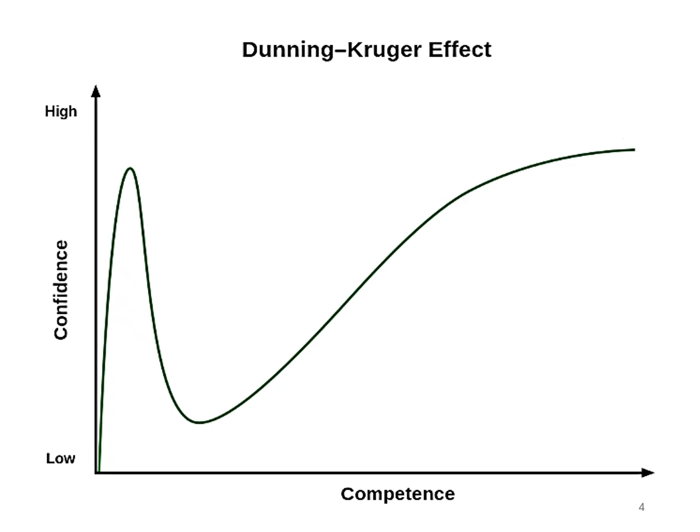Which brings me to Dunning-Kruger, which I prefer to call the Machiavelli-Schopenhauer effect, because these guys, Machiavelli and Schopenhauer, talked about the same thing hundreds of years before Dunning and Kruger. It is a principle relating confidence and competence that can be summarized as the more you learn, the less you know. That is, the more you doubt yourself.

I realized that quite strongly when I was completing my Viva Voce exam at the end of my PhD. Basically, a Viva Voce means living voice. You've written a thesis and you defend it in front of a panel of professors who in principle understand and know everything about the subject. And they question you. And when they question you, you realize how little you know. And it's very embarrassing. So I passed.

I don't know why, but I think I was probably in the bottom 10% of all the students that my supervisor had. But at the end of the exam, I was in his office and he looked at me and he says, "What's wrong, Malcolm? Why do you look so glum?" And I said, "You see that door?" And he said, "Yeah." I said, "I feel I could walk under it. I feel so small. Either walk or slither under it." And he looked at me, he didn't smile, but he said, "Good, because if we let you go out of here thinking that you knew something, we would have failed."

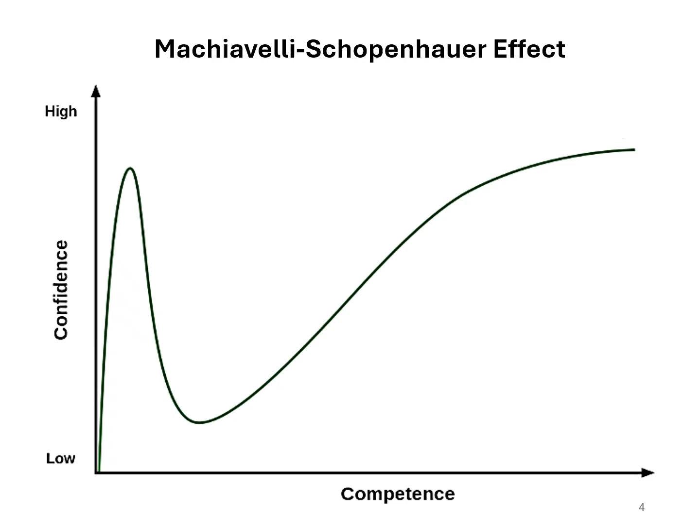I understood that. I spent 45 years in research, and in the last 15 years, I was an R&D manager. I came across two types of people. Those who were receptive, that are willing to talk and listen, and those who were unreceptive, and I class those people as willfully ignorant.

There have been times in the past when a material issue arose in the reactor, and I was shocked at the ignorance of some of my coworkers. In those cases, a little knowledge is a dangerous thing, meaning they believe they know everything they need to know. I once said to a fellow middle manager at Kinectrics, you know, you can lead an engineer to water, but you just can't make them think. I was so mad with them.

To illustrate, to give you some examples, once there was a commotion at Chalk River about 20 years ago. There were some concerns because there'd been some measurements done, some tests on pressure tubing, and there was an unexpected result. It was a high value. I'm not going to talk about exactly what it was, but anyway, this was S99 reportable, meaning it had to get relayed to the CNSC.

Now, when I saw what was happening in email space, I sent an email to the group and I said, oh, I think I know what's going on. You may think it's an unexpected result, but it could be very expected depending on where you took the sample. If it was at 1 meter or 2 meters from the inlet and it was at 12 o'clock, I would expect that to be a high value. I didn't hear anything.

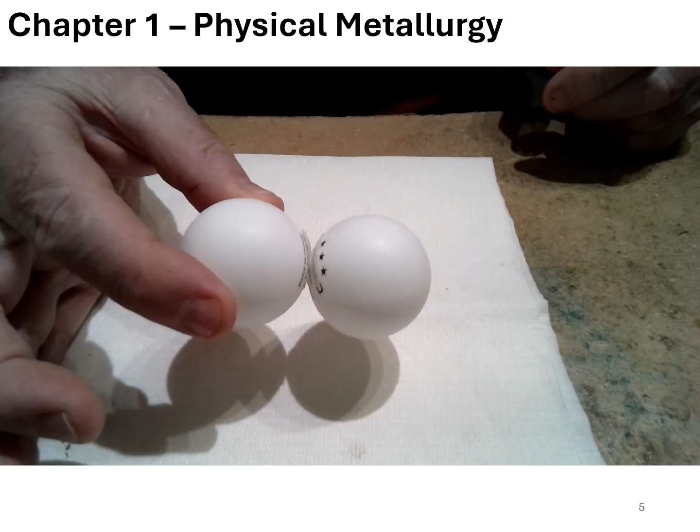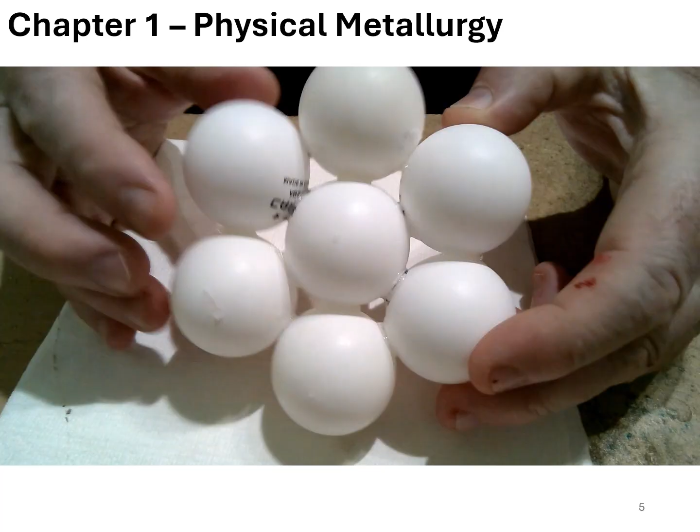Now, once we have this bond system in place, then the next level of bonding has to do with minimizing the energy of the system. And that can be achieved by packing the atoms together with the shortest possible bond lengths. And in this case, it's a close packed structure. And this is an example of a single layer of a close packed structure, and it has this distinctive hexagonal shape. So I'm going to think about the three-dimensional structure.

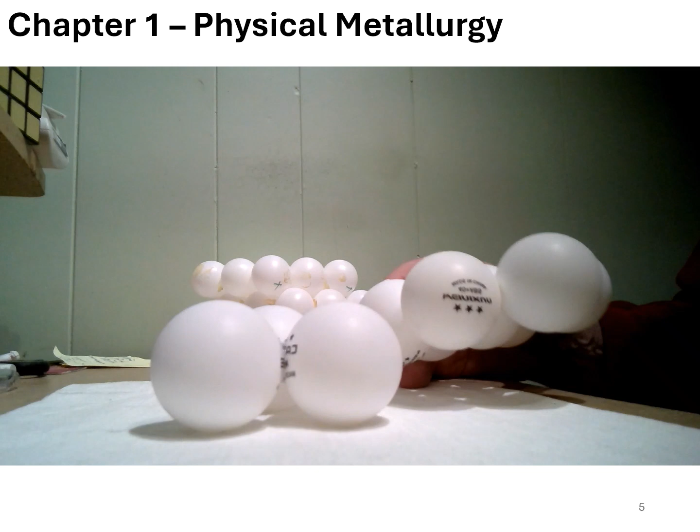Let's put down a first layer. It's easier for me to use 3 atoms in this case, so I'll just use 3, because then I'm going to sit the next layer on top, which is my close packed layer. Now, if I want to build up a three-dimensional structure, I can do it in 2 possible ways. I can either put the next layer of atoms on here, like that. And you'll notice this atom here is directly above this atom here.

So if we call this layer an A layer, and we call this layer a B layer, this atom, which has the same position looking down on the plane as this atom, we would also call that an A layer, because the layer designation letter defines the position of the atoms relative to the whole lattice. So we have what's called ABA stacking. And that defines what is a hexagonal close-packed metal, this ABA structure.

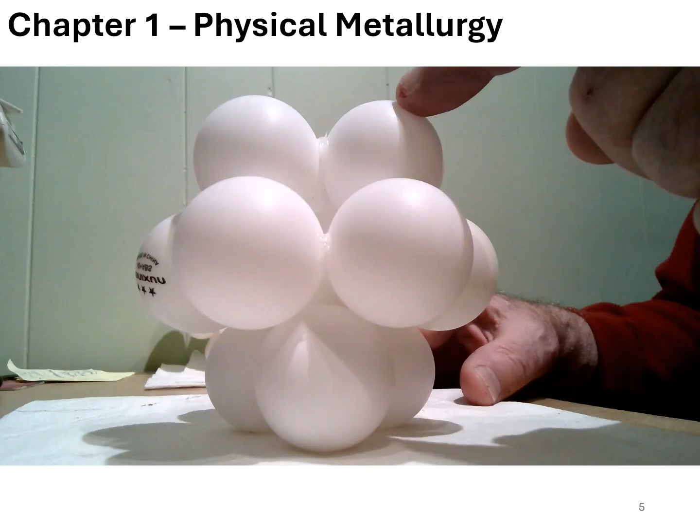Now, the third layer of atoms doesn't have to sit like that. It can sit in this position, which is just as stable. In that case, we have ABC stacking. So there are three different positions for the different layers. So what distinguishes a face-centered cubic crystal structure from a hexagonal close-packed structure is simply the position of that third layer. So this is hexagonal close-packed, and this is face-centered cubic.

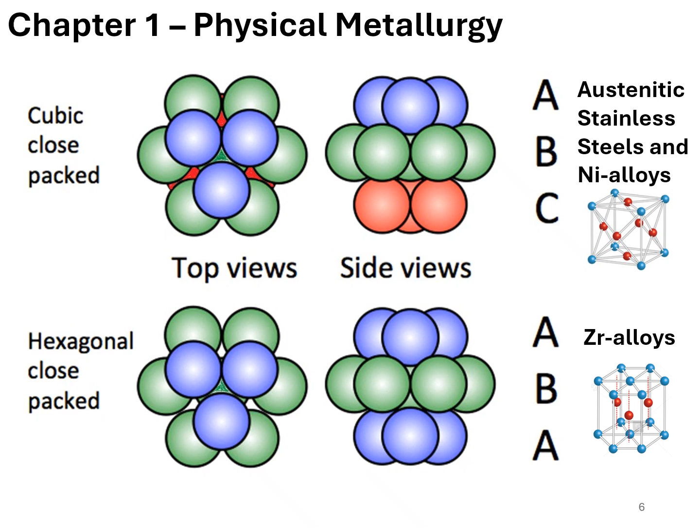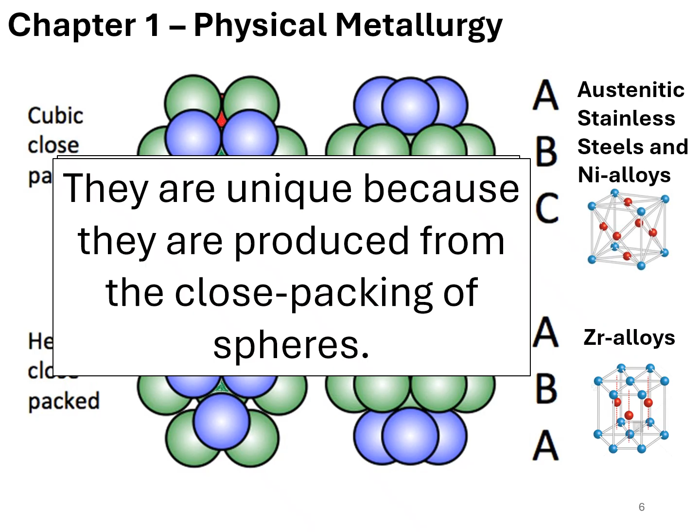Now, these crystal structures account for most of the materials used in reactor cores, but they're unique because they're produced from the close packing of spheres. But not all metals are FCC and HCP. They represent 2 of 14 different possible atomic arrangements that define the crystal: 7 different crystal classes and 14 unique arrangements that have different centerings.

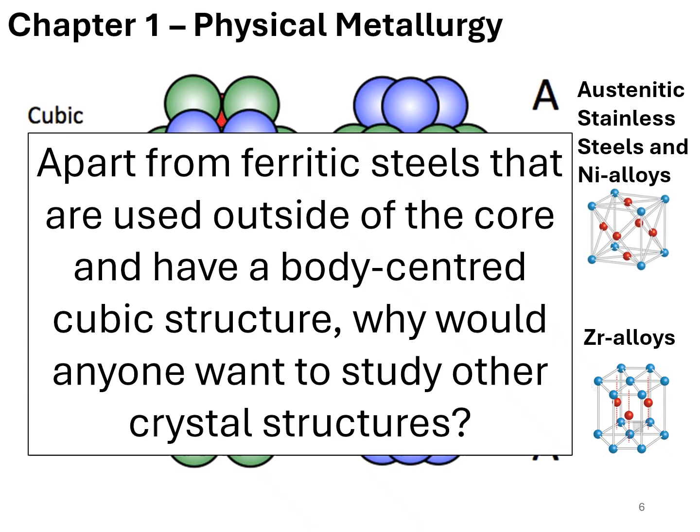It may seem boring to study, but a little knowledge of crystallography can be a source of fun. I'll illustrate this here. When I was a student studying metal physics at Bristol University, one day I was walking with a small group of fellow students for lunch at the Students' Union. We just had some lectures on crystallography. One student in the group had studied at the University of Bath and hated Bristol. He said, "I hate Bristol. Look at all these buildings. They are so monolithic."

I thought, hello. There's an opportunity for a joke here, because monolithic sounds a lot like monoclinic, and a monoclinic crystal is nothing like the slab-like shape that one would expect for a high-rise building. So I said, "Oh, I don't know. They look more orthorhombic to me." He then had 2 things to hate about Bristol: the town and me.

It is important to know some crystallography if you want to understand all aspects of metal physics, including deformation. So I'm going to give you a very brief introduction to deformation as relates to metal crystals.

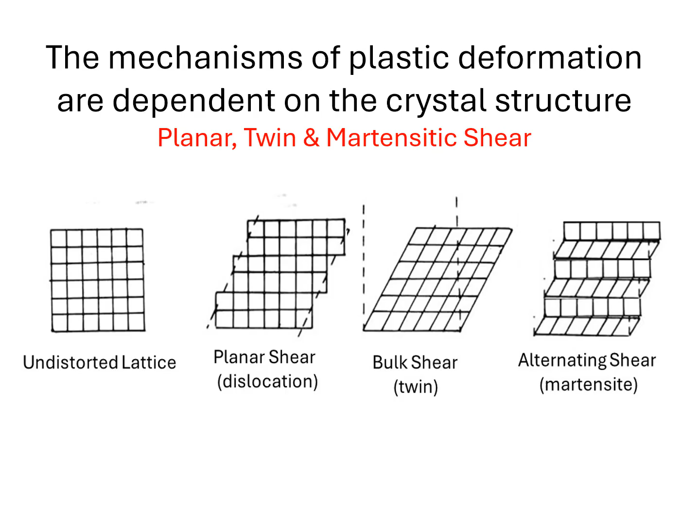Oh shit. Right now I would be demonstrating the shear from slip and from twinning and from martensitic transformation. That would take about 2 or 3 minutes, and unfortunately I can't go back right now because this is recording.

So I assume I've just told the audience everything they need to know about dislocation slip, using a ball model displayed at the front of the lecture hall. So in this ball model, I refer to slip, twinning, and martensite, which are the 3 main processes that cause deformation of metal crystals.

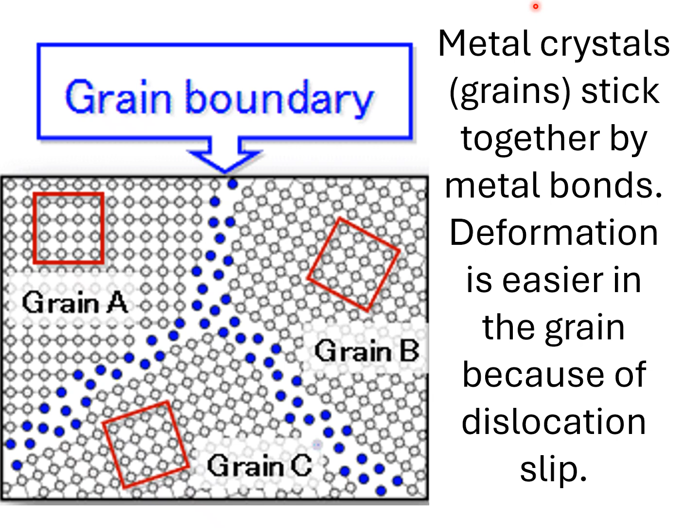So I've been describing the deformation of single crystals, but engineering alloys are made from an agglomeration of crystals that we call grains, and they are bound together by metallic bonding at the grain boundaries. The boundaries are much stronger than the grains because the regularity of the atomic arrangement actually makes it easier to cause deformation. The underlying deformation mechanism within the grains involves dislocations.

So what is a dislocation as far as metals are concerned? Just like someone may dislocate an elbow, involving displacement of a bone from where it should normally be, dislocations in metals involve the displacement of some atoms from their normal positions. The dislocation is the line along which all the bonds have been broken. This is known as a line defect.

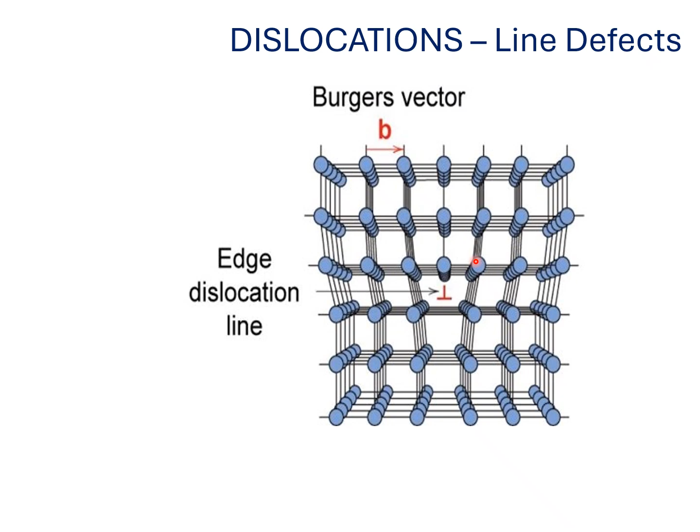Now, this slide illustrates schematically how dislocations operate and how they make it easy to deform a metal. Normally, if you have a metal like this, and you wanted to move this top half relative to the bottom half, it would be very difficult. It would take a lot of energy and a lot of force to break all the bonds along this line.

But there's a trick. What happens is that when we push on top of the top part of the crystal, we can break this bond and this bond. And then this bond will reform with that one. And then this plane of atoms, or this section of atoms, will move forward. And you end up with a line of dangling bonds here, which is the dislocation.

Now, as we continue to push on the material, that dislocation moves by breaking bonds of the adjacent plane and reforming the bonds, by a series of breaking and reforming of bonds. And when it gets to the end of the crystal, we have a step and the deformation has proceeded, but with a very minimal amount of force being introduced.

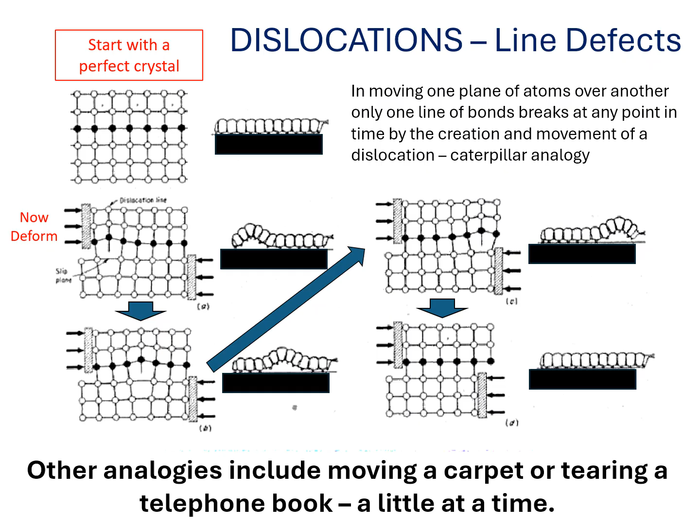Other analogies include moving a carpet or tearing a telephone book. Basically, you do it a little bit at a time, and that takes a lot less force at any one point in time. Less power.

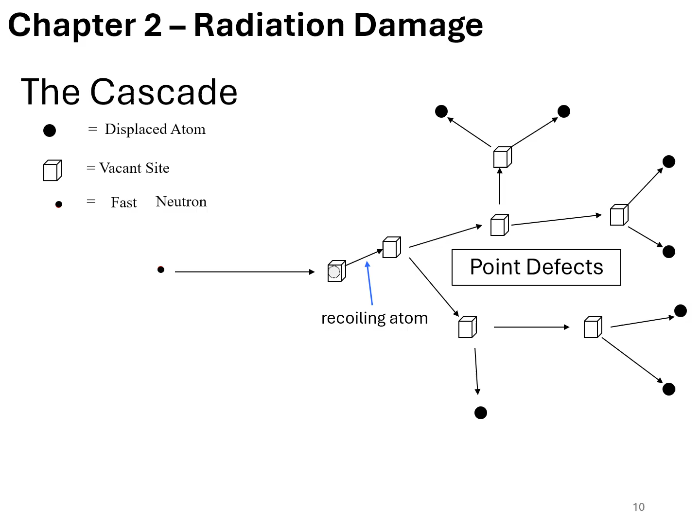So I told you about dislocations, which are line defects. Another type of defect that is important for material behavior when subject to neutron bombardment is the point defect. Here's a schematic illustrating how neutrons can cause the displacement of atoms from their lattice site. In this case, we have a high energy neutron, let's say it's 1 million electron volts, and it comes barreling into the lattice and it collides with an atom.

There's a certain probability of that happening, of course, and it can impart some energy, to different degrees, because it may glance off or it may be a direct collision, just as you would have with a billiard ball table or a snooker table. Sorry, we are in North America right now, a pool table.

So the energy needed to break bonds in atoms is around about 40 eV. So as long as the incoming neutron can transfer more than 40 eV energy to the atom, it will cause a displacement. But typically it produces many thousands of eV in the primary knock-on if it's a 1 MeV neutron, and then that goes on to create many displacements. So that's high energy neutrons.

But what about thermal neutrons? Are they important? Well, they are a little bit. If you have a thermal neutron, it can interact with the lattice by being absorbed by the atom. Thermal neutrons have energies a fraction of an eV. That's not enough to displace the atom, but the gamma photon that's emitted from the activation of an atom by a thermal neutron has a certain relativistic mass, and the recoil produced can cause displacements, typically about 4 or 5.

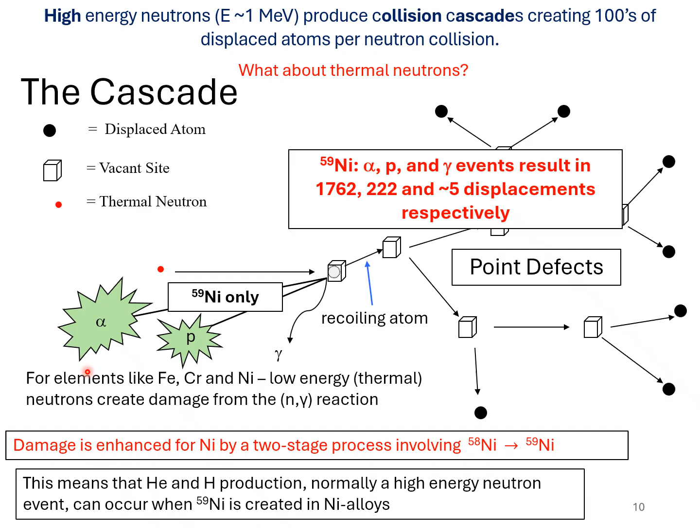So when you have nickel around, you get an enhancement of the displacement damage, which creates point defects. I should have mentioned this about point defects. These are the displaced atoms, but there are both displaced atoms, which we call interstitials, and vacancies, which are left behind when that happens. Sorry about that. So not only do you get an enhancement of the displacement damage, but you also deposit a bunch of gas in the matrix. And that can have very serious consequences for materials.

And this summarizes what I've just said. Now, these point defects created by atomic displacement can then migrate by solid state diffusion and cause changes in the microstructure. They can cluster and create other defects, planar defects or three-dimensional defects within the metal that change its properties. And we can use tools to look at this effect. And one common tool is the electron microscope.

Now, microscopes originally used to be very crude. I'm sure they had their uses. Here's an example of identifying, characterizing a mammoth. But this is an optical microscope, and it's non-transmission, because in order to study metals, we have to shine radiation through the metal in order to reveal what's inside.

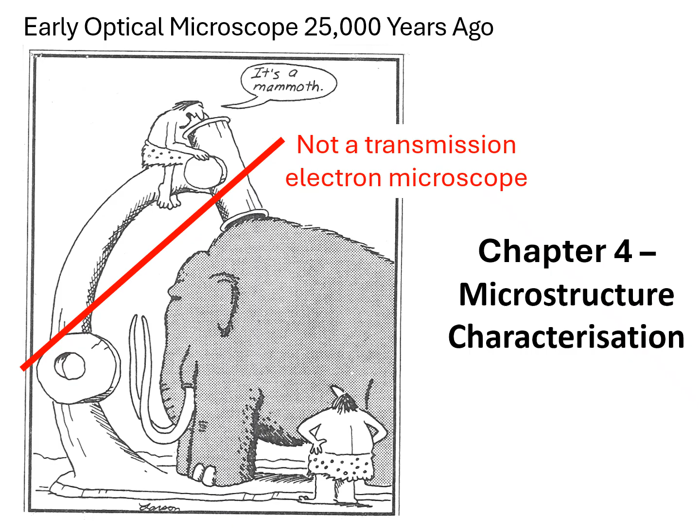So just like you would go and get an X-ray, you can look at your bone structure by shining X-rays through your body, and it shows where the bones are. And we need to know, in case of metals, where all the defects are in the structure. And so therefore we want to have a transmission mode. So here's an early optical microscope, and here's an early transmission electron microscope, which involves shining electrons through pieces of metal and looking at the effect on the trajectory of the electrons.

Now, the transmission electron microscope can be used for a number of things. It can be used for fun. We can produce pretty patterns, diffraction patterns. A couple are shown here. I did this on the CM30 in CNL many years ago.

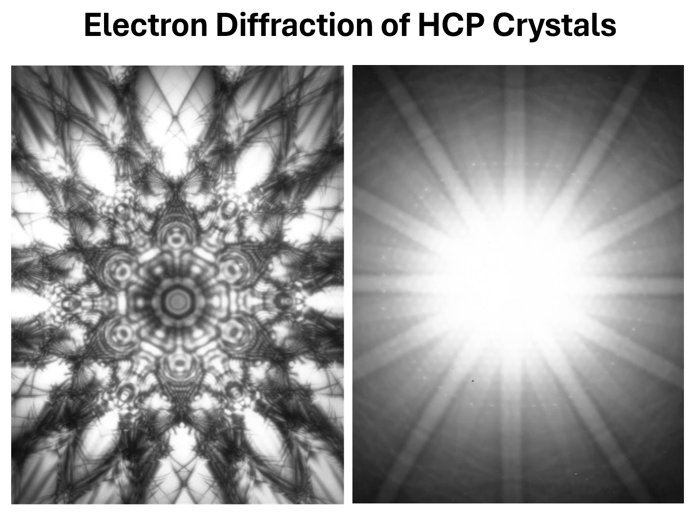And they can also be used to look at the defects one gets from the radiation damage. So here's a micrograph shown by shining electrons through a piece of metal. And the little loops we see here, the little ellipses, are actually clusters of atoms or holes in this particular case. And these affect the properties of the material. But we can image them and learn something about the processes, both causing the damage, but also what the damage then does to the rest of the material.

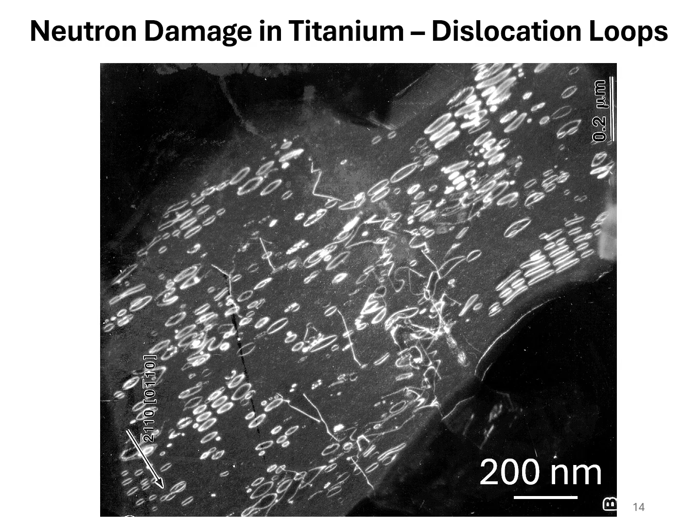Schematically, what's happening, you've got two possibilities. The vacancies can migrate and cluster together. And when they do that and form a platelet, like this, that results in a collapse of the lattice, as we see here. But if the interstitials migrate and form into a platelet and it gets stuffed between the planes of atoms, that causes an expansion of the lattice.

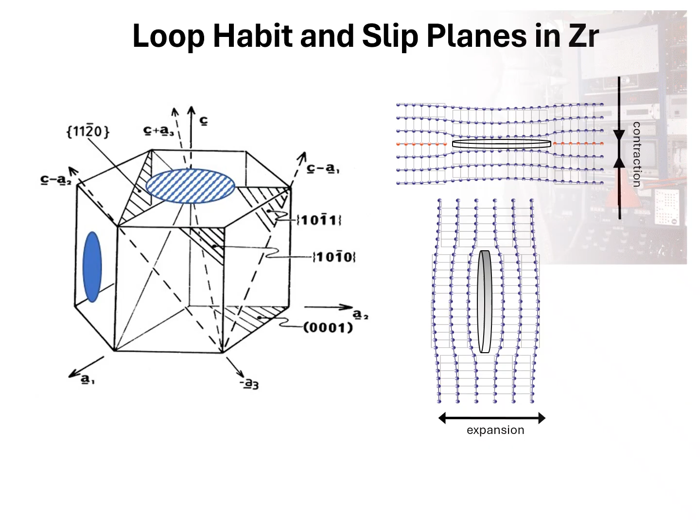Now, a low voltage electron microscope may have enough electron energy to transmit electrons through a thin piece of metal. But what if the metal is thicker? Well, then we might use a high voltage microscope, basically beef up the electron energy so we can look through thicker sections. The bonus of using a high voltage microscope is that we can actually also cause damage, and we can look at the damage as we're producing it.

So here's me in Stuttgart many years ago. I went there a couple of times at the behest of one of my colleagues who was interested in the diffusion of vacancies. So I did some experiments, and I would basically turn up on the red eye early Monday morning. I'd work through the whole week, generally till 3 or 4 o'clock every morning, doing experiments, and then fly back on the Friday to get back to my family. The saving grace is a lot of these experiments would take many hours of irradiation, and I would get them started, and then I'd be twiddling my thumbs.

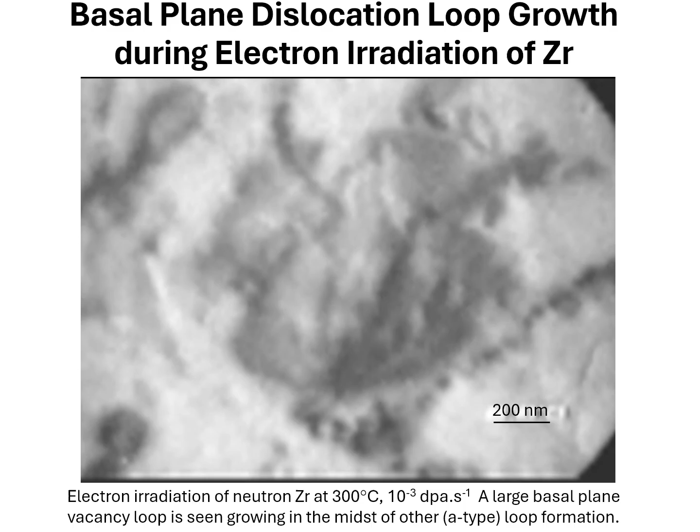Not all radiation damage involves dislocation loops, however. Phase changes can also occur. Here's an example of an amorphous phase change in a precipitate in zircaloy.

This amorphous transformation was first observed by a technician at Chalk River in Brian Cheadle's branch. His name was Ross Gilbert. Ross deserved more credit for making this discovery than he actually got, because a lot of other labs quickly jumped on the bandwagon and all claimed they made the same discovery, when it was actually Ross sending them his data, which was galling.

To us, it had very little practical importance. Other labs thought it was neat, and they spent a lot of time flogging the dead horse, I would think.

One of the labs was a French lab at the Centre d'études nucléaires in Grenoble, and one of the lead scientists there, who I would consider a friend, is Clément Lemaignan. He retired some time ago, basically back in 2006. Because I was his friend and colleague, the French paid for me to go to Paris and make a presentation in his honor, which I did.

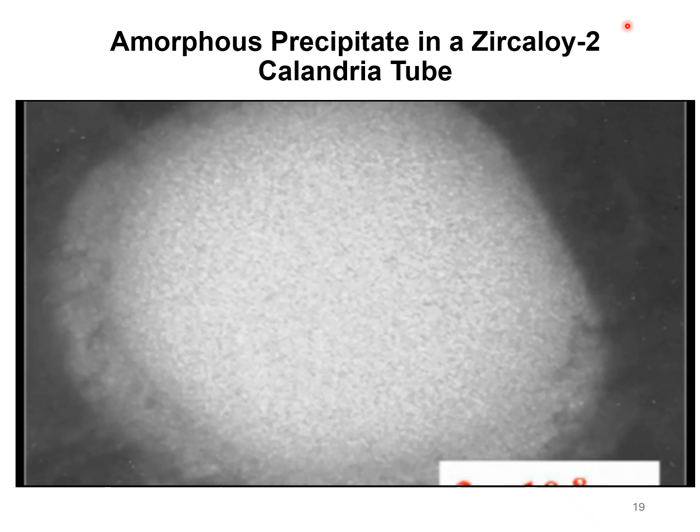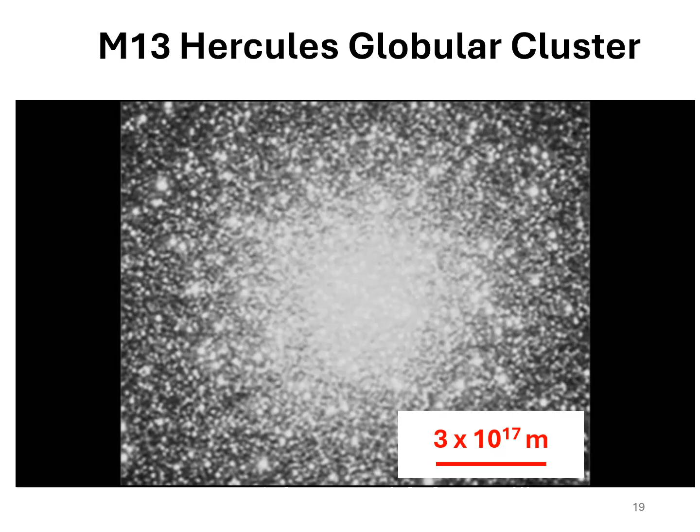As we zoom in, we see more detail, and then a little bit closer. But now I'm going to zoom out. I changed it from looking into an amorphous precipitate to the M13 globular cluster. This just illustrates that some of the structures you might look at, whether you have a telescope or a microscope, look very similar. It's really all a question of the length scale.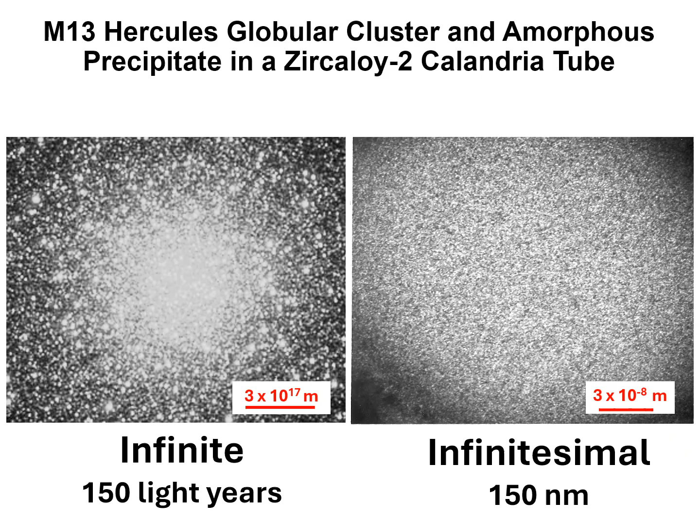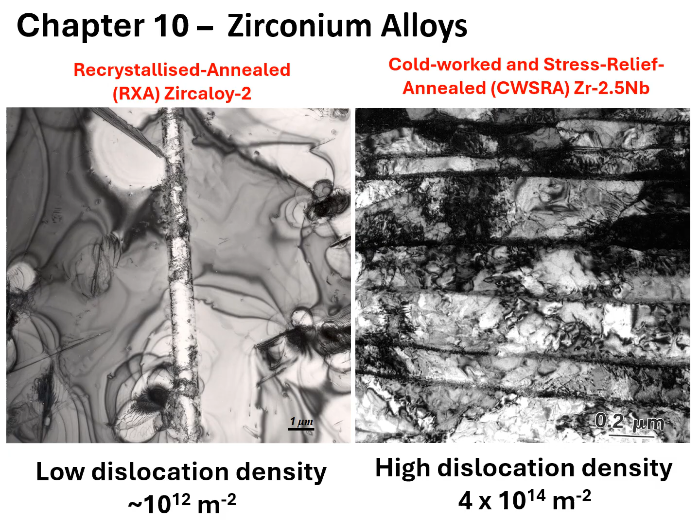What this means is that the dislocation density is, in this case, 4 times 10 to the 14 meters per meter cubed of dislocations in the material. So what do I mean by that? Well, if I take a small sample of pressure tube, roughly a cubic centimeter, and I took all the dislocations and joined them end to end, I could stretch them from the Earth to the moon.

If I had all of the dislocations in a whole pressure tube - and remember, there are 380 pressure tubes in a given CANDU reactor - so for a single pressure tube, if I took all the dislocations in it, I could stretch them from here to Pluto and back twice.

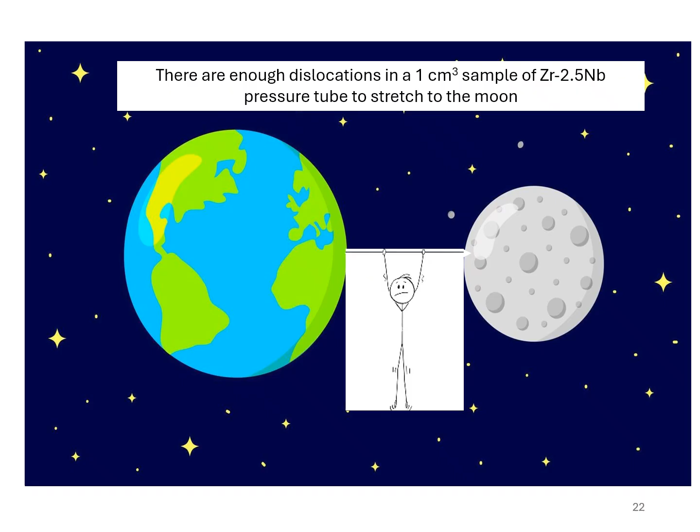The last few chapters in my book are about materials issues in different reactor types. In chapter 14, I talk about heavy water reactors, and CANDU reactor is the most famous one. What distinguishes CANDU reactors from many other reactors is that they run on natural uranium.

They do so by having heavy water as the coolant and moderator, but also most of the internals are made from zirconium alloys. They're made from zirconium alloys because zirconium is very good at not absorbing neutrons. So that's exactly what you want - you want to preserve your neutron economy.

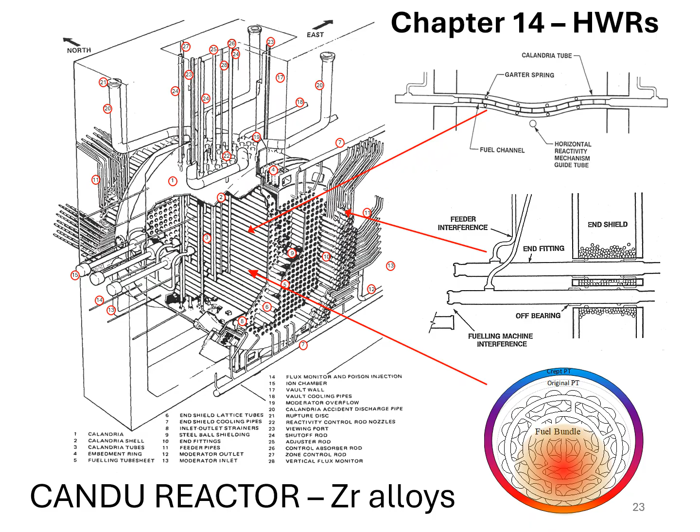But there are some specialist parts that even in a CANDU reactor you have to have these other materials in, thankfully not very large volume. These specialist parts typically are nickel alloys, and nickel alloys are very good spring material, so they're used in certain locations in the CANDU reactor.

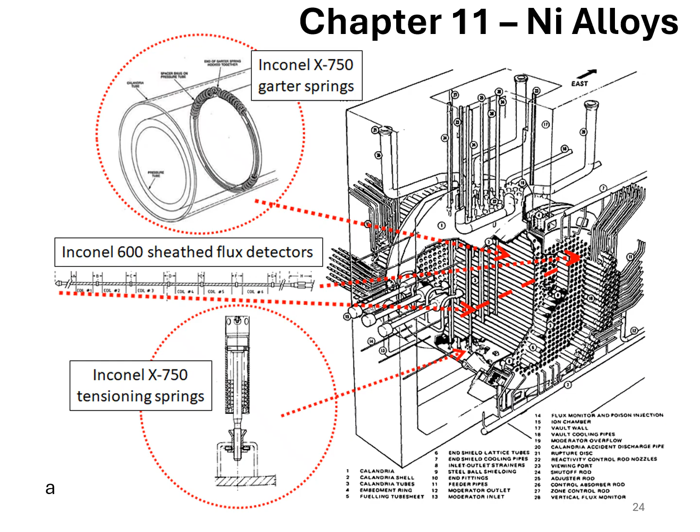Probably one of the more important springs is the garter spring. The garter spring, also known as a spacer, is wrapped around pressure tubes at 4 locations and separates the pressure tube, preventing it from sagging and making contact with the cold calandria tube. The pressure tube is hot, it contains the fuel and the coolant, and the calandria tube is cold because it's in contact with the moderator.

If the pressure tube contacted the calandria tube, you'd get a cold spot that would result in blister formation, and the tube would eventually go bang, as it did in 1983 and in 1986.

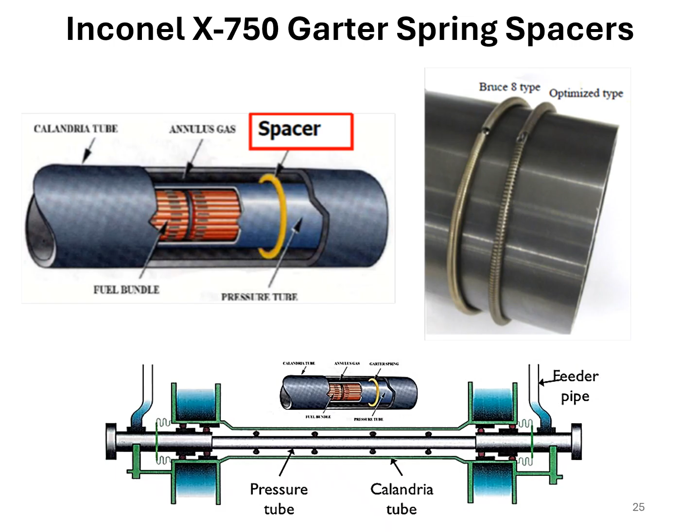So imagine the concern some people had, not everybody, about 15 years ago when a spacer that after 15 years of service was pulled out of a reactor, got to Chalk River, and it was broken in many pieces. Not a good thing to see.

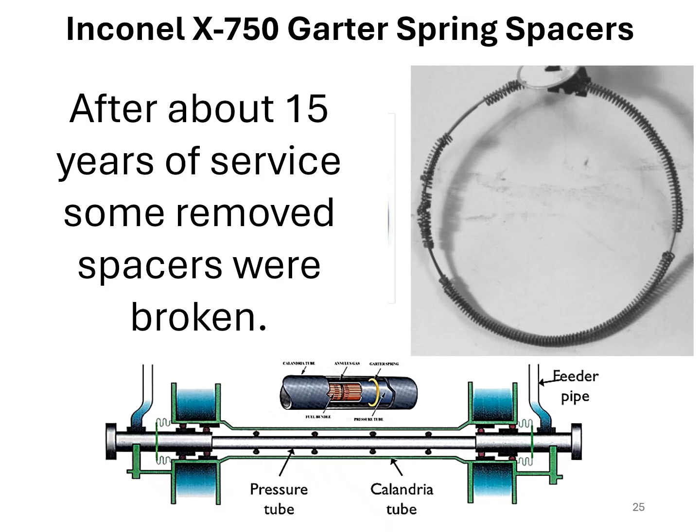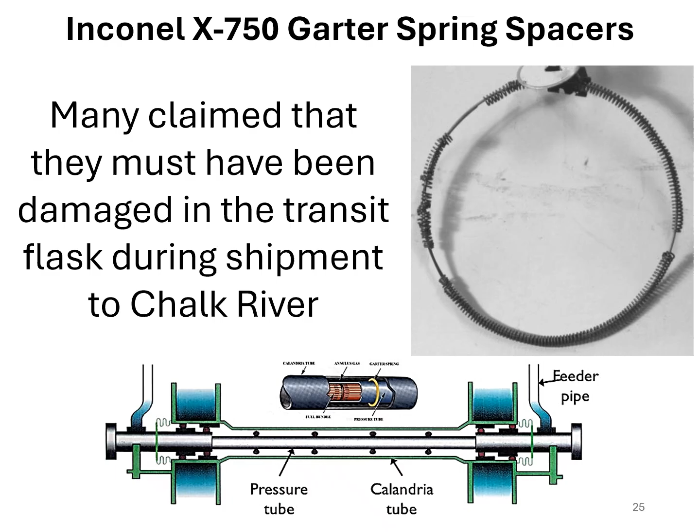Many of my colleagues, many people, certainly in higher management, a lot of the engineers at Sheridan Park said, yeah, but that's going to happen because it gets bashed around in transit. So I said to my staff, I was a manager at the time, I said, go and simulate the damage that you would get of an unirradiated spacer in transit.

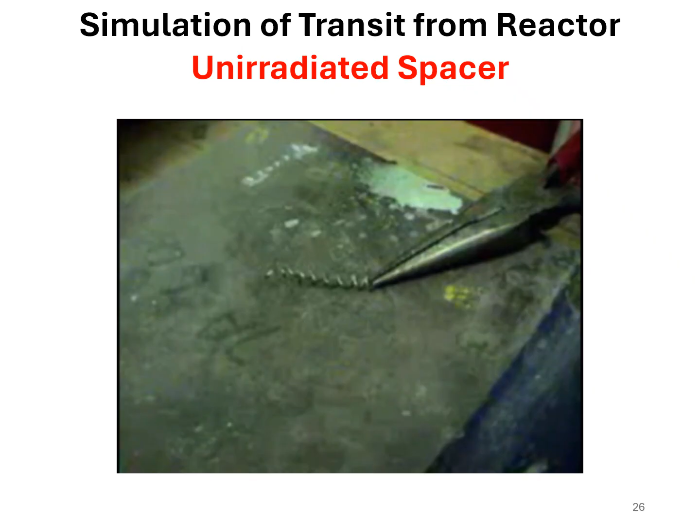So here's them doing a simulation in the lab. This is simulating transit in a truck from the reactor to Chalk River Laboratories. As you can see, you can deform the spring, but it's very difficult to break.

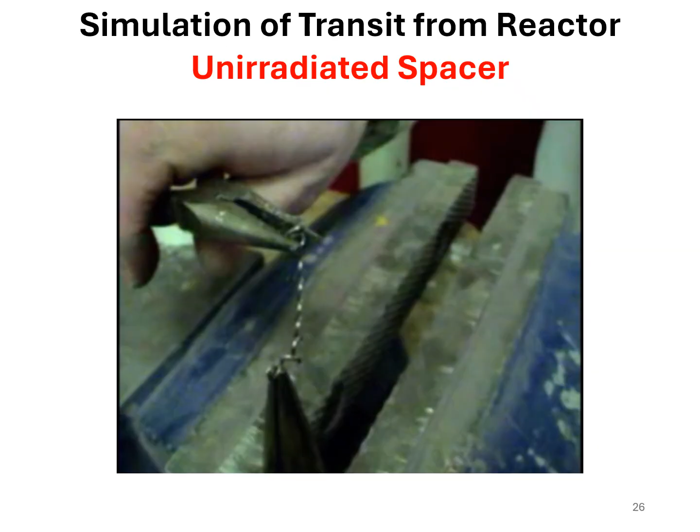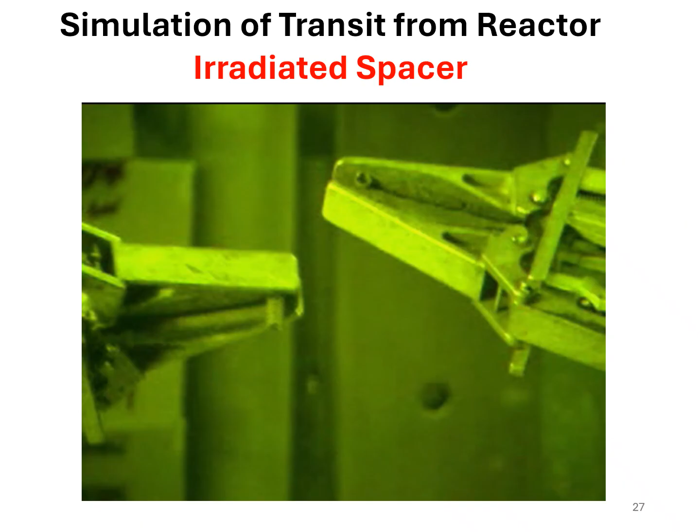You can break it, however, by fatiguing it. This is an irradiated bit of spacer. In this case, the testing has to be done in a hot cell, and this is a much gentler form of testing. It's simply bent, and it breaks very easily. You could break it with your fingers - not that you would stick your hand in a hot cell, you'd get fried very quickly.

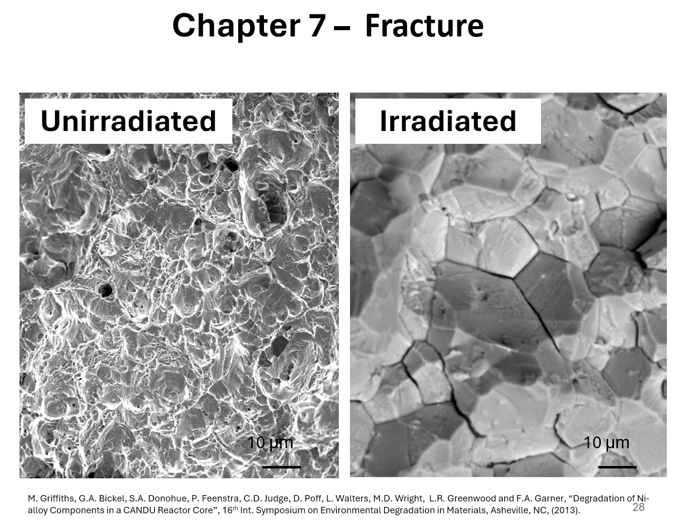So I mentioned about fatiguing. Even the unirradiated sample, you could actually break it just as you can with a safety pin, with a paper clip. If you've ever bent a paper clip back and forward, you can break it. And this is what the fracture surface would look like.

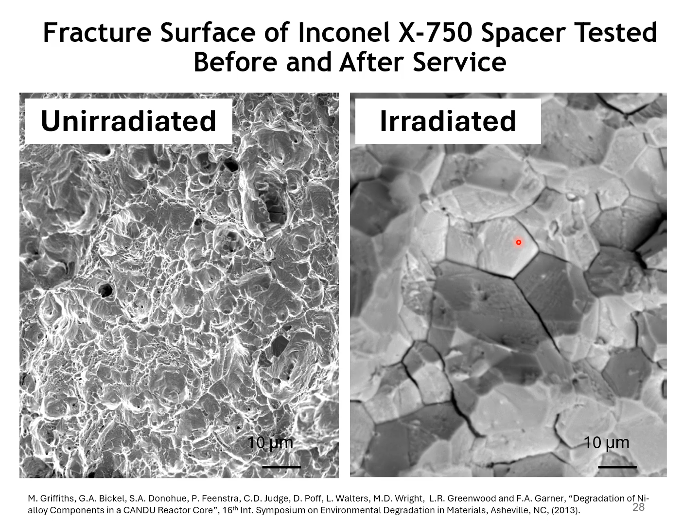But in the case of the irradiated spacer, it doesn't look like that at all. It's faceted, and these facets correspond to the grain boundaries. So the unirradiated material deforms and eventually fails by ductile fracture, but the irradiated one is a brittle intergranular fracture. And I recognized this at the time as helium embrittlement.

But I had a hell of a time trying to convince people, because they were not convinced that you get much helium in CANDU reactors. But in fact, you do. You get a 100-fold increase in helium compared to any of the US reactors.

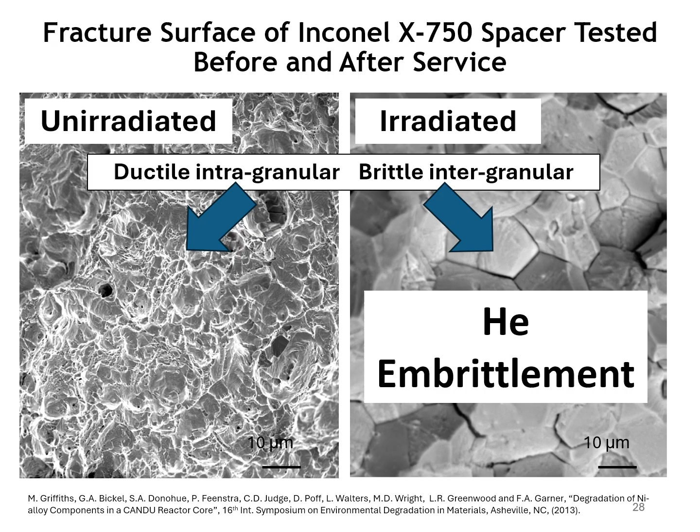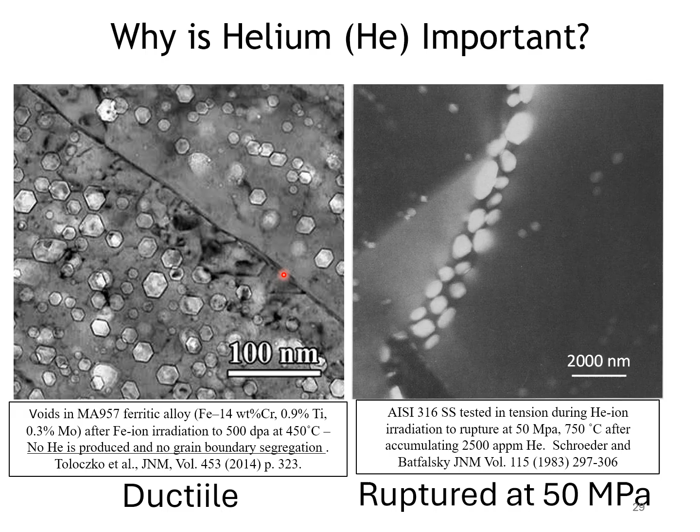However, if you have helium around, it stabilizes these vacancies on the grain boundary, and you get a perforation of the boundary. So normally, if there's no helium, the vacancies will be absorbed by the grain boundary, but not when helium is present.

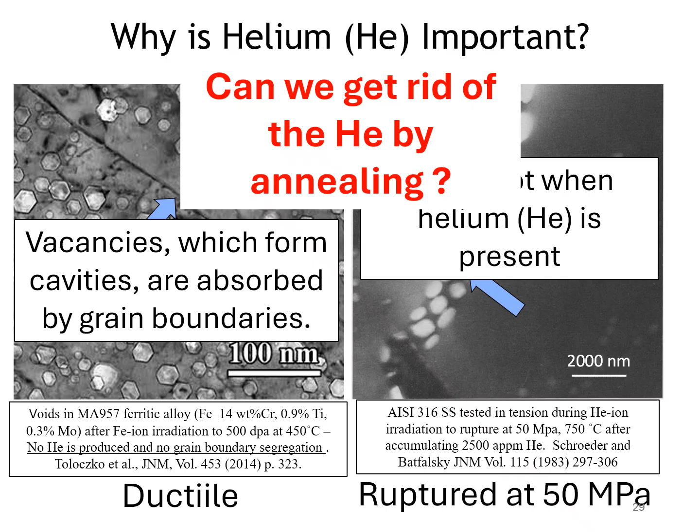I was illustrating this at a meeting with the CNSC some years ago, and there was staff from OPG and the CNSC, and they all raised the same question: well, can we do something? What can we do? We've got all this helium in our spacer materials. Can we get rid of it by annealing, for instance? And I said, nope. Helium is like herpes - it is forever.

And that's the summary of some interesting stories, some of the more interesting stories that I thought might give you a chuckle. Do you have any questions?